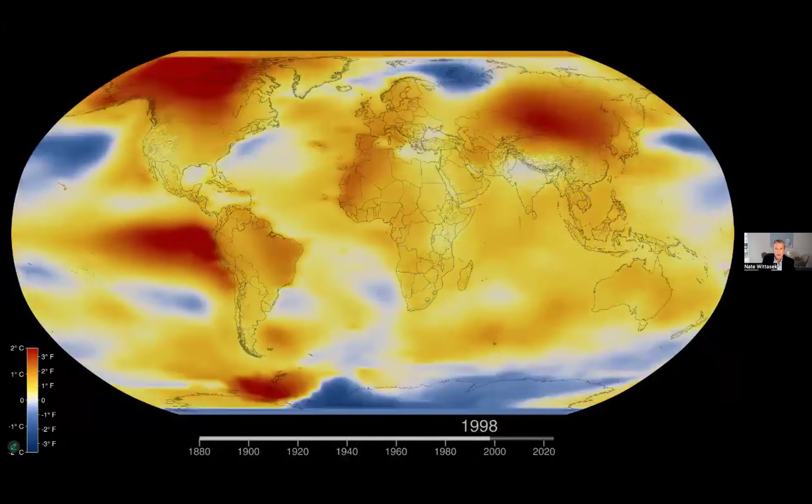So what I want to show you today is some background on what's happening. In this video, you see that in the early decades, we had mostly cooler than average temperatures. But as we fast forward, the temperatures steadily rise 2 and then 3 degrees above average. Warming is visible nearly everywhere on the planet, with particularly strong increases in the Arctic, the continental interiors, and the ocean regions, which are affected by shifting currents.

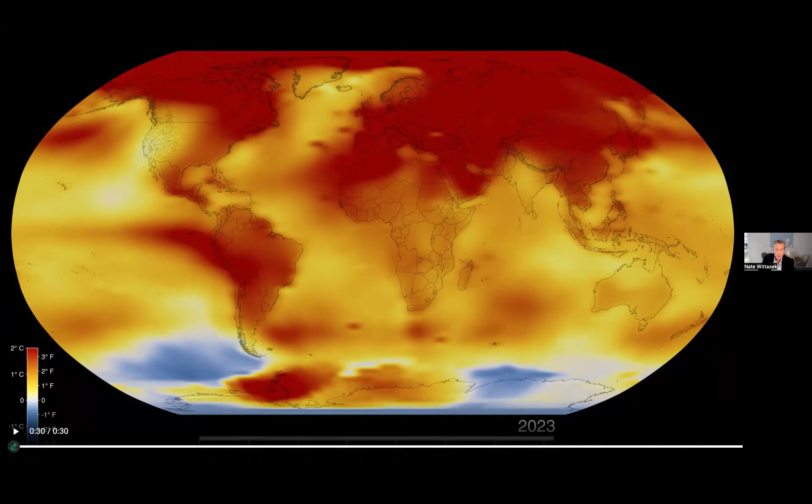The long and the short of it is that the baseline has shifted. Over the last 140 years, we have moved to record-breaking heat virtually everywhere on the entire planet, and this effectively represents a new climate baseline. It's not a temporary anomaly.

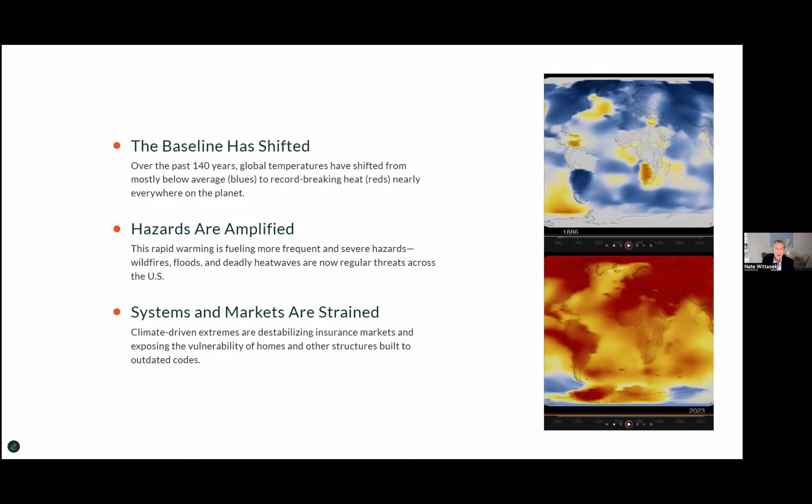What this means is that the hazards are amplified. The warming is intensifying wildfires, floods, heat waves that are now regular threats, and the long and short of it is that these events are more frequent, more severe, and more costly. This means insurance markets are destabilized by these escalating losses, and home and infrastructure built under outdated codes are increasingly vulnerable.

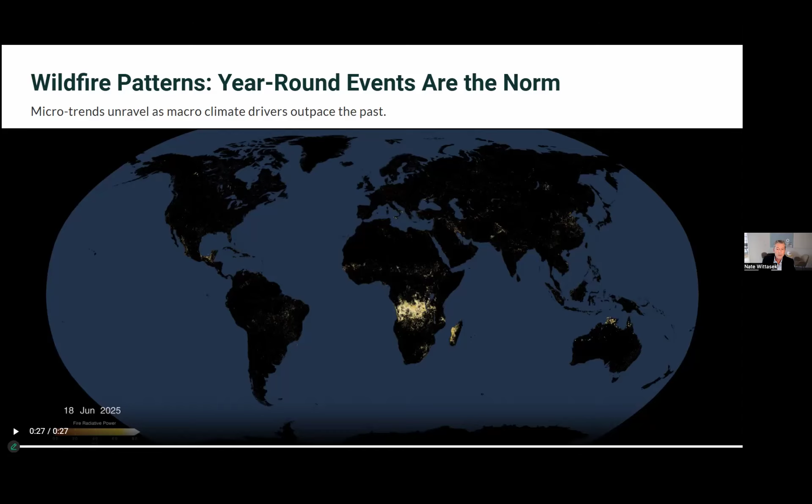In this video, you can see an annualized look at wildfire occurrences taken from a satellite, pulled together from the NASA Visualization Center. You can see in the course of a year what the planet looks like with respect to large wildfires. It's global, not local, and macro climate forces such as warming, drought cycles, and shifting precipitation now overwhelm historic seasonal patterns, creating unpredictability. So wildfire is no longer a seasonal hazard—it's a global, continuous threat driven by climate extremes.

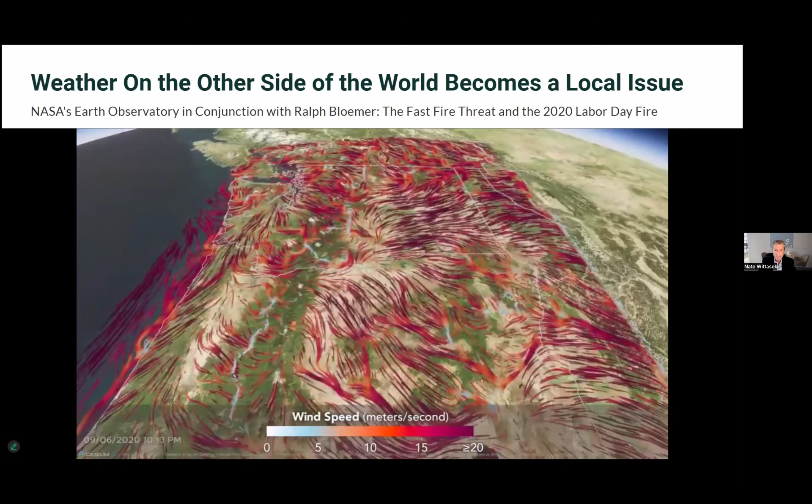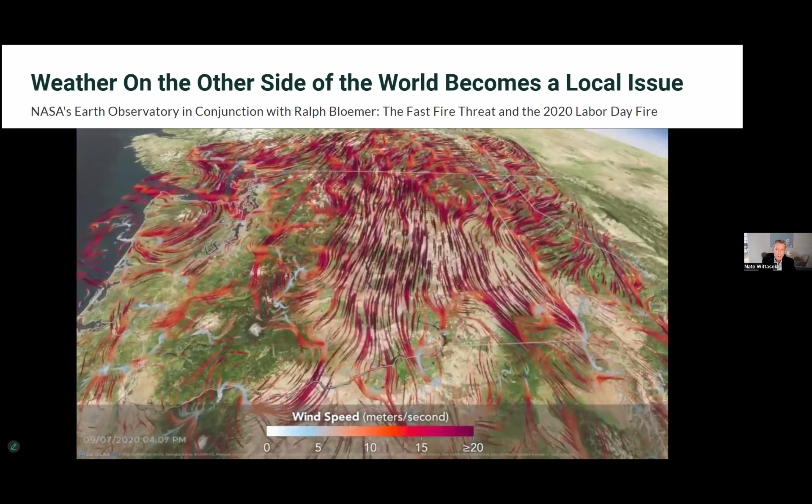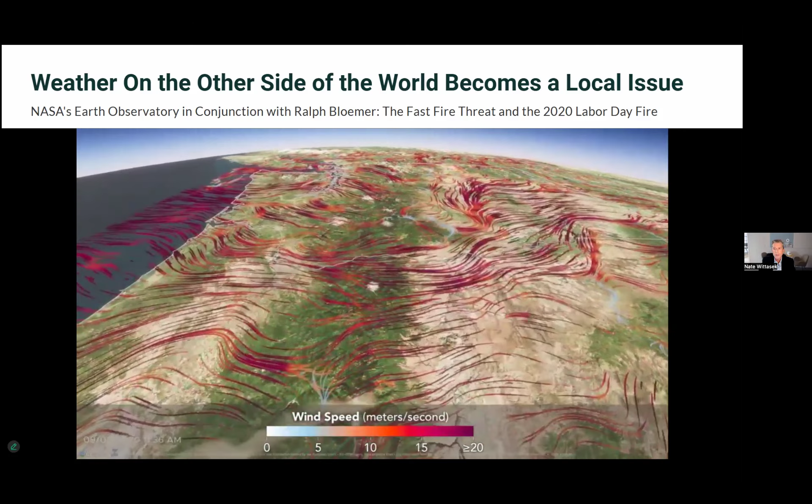In your home state, you have recently, in the last few years, been subject to some of the most incredible examples of this climate. In the 2020 Labor Day fires in Washington and Oregon, these were what we call fast fires. In 2 weeks, as much land burned west of the Cascades as during the past 50 years, according to the U.S. Forest Service. One of the Labor Day fires, the Cold Springs Fire, was the 3rd fastest ever recorded in the database. And what's really interesting...

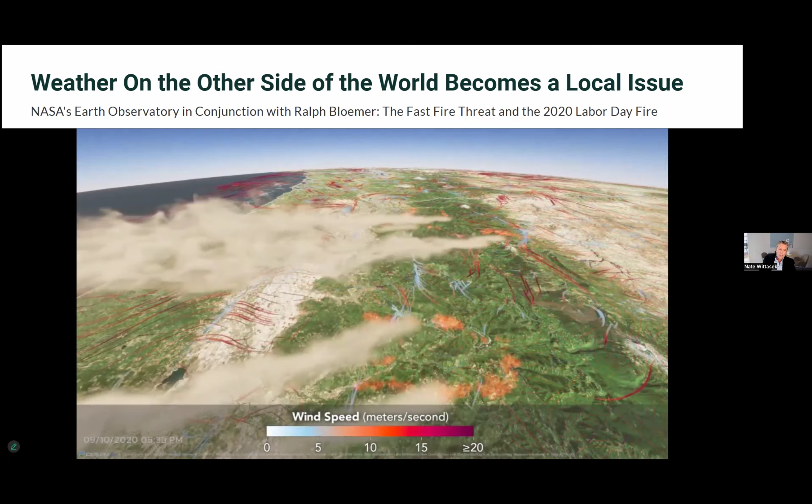This setup that you're watching on the screen began thousands of miles away with 3 powerful typhoons that struck the Korean Peninsula in quick succession. And this is an animation that was constructed to understand what was happening and relate the wind to the fire directions.

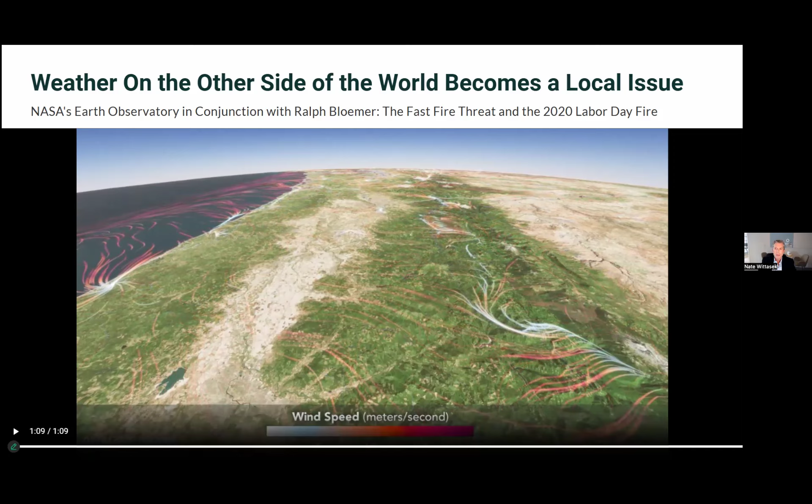So despite decades of investment in firefighting, policy, and mitigation, the long-term trend is pretty obvious when you look at this: U.S. wildfire acreage is rising, not falling. So what do we take away from this? One, the steep upward trend means that relying on past methods like basic fire suppression, basic hardening, or the way we historically have planned is no longer adequate. The driver behind this chart is a combination of climate change, including hotter, drier seasons, longer fire weather windows, growing fuel loads, and the expansion of the wildland-urban interface.

To be resilient, we're going to have to address all of these fronts, not just firefighting. Resilience means that we have to be using a proactive, multi-tiered strategy.

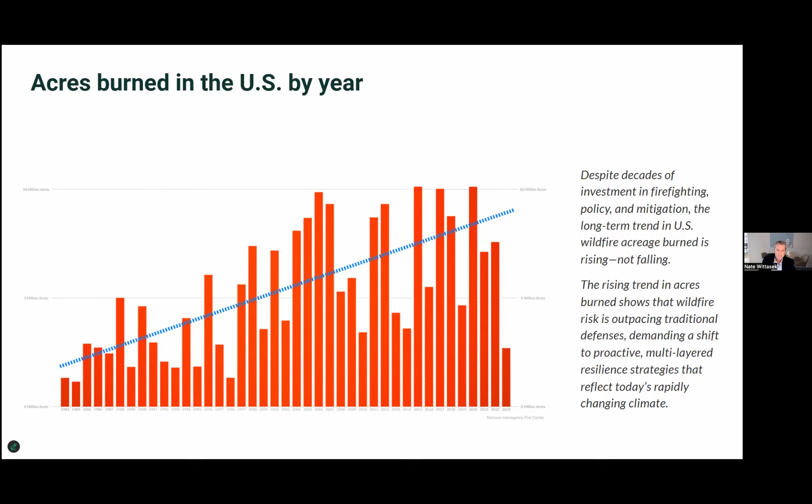When you think about the scale of risk as it pertains to financial losses, the first place we start is how many structures are at risk. We're approaching 90 million structures that are at risk across the US for different types of hazards, including wildfires, droughts,

severe storms, floods, freezes, winter storms, and tropical cyclones. And it's hard to say that one doesn't affect the other. As I mentioned at the beginning, the Labor Day fires in Oregon were really something that initiated from a cyclone across the world, which is something I think we don't always think about how that can happen, but that is exactly what is happening.

Disaster events have grown from a handful in the 1980s to about 20 to 28 per year in recent years. The economic impact has escalated dramatically as well. So whereas in the 1980s we were talking in the tens of billions, by the 2020s the costs regularly exceeded $100 to $500 billion annually. And if you look at this chart, it doesn't even show what happened in 2025 yet.

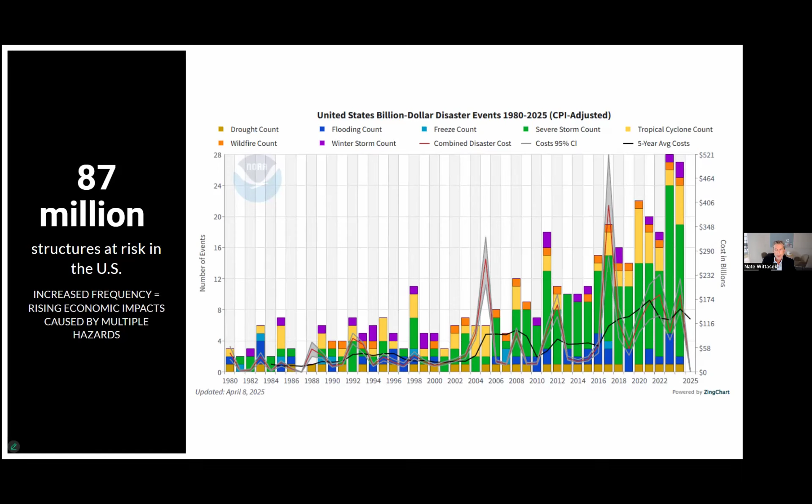When we think about risk relative to the population, the largest clusters are the West Coast, in California, Texas, Florida, and the Eastern Seaboard as well, where the density overlaps with the hazard exposure. Many counties with 200,000 plus units at risk are urban or suburban centers, not just rural wildfire or flood zones. This alignment basically means that the hazards are a mainstream market issue now. And people designing houses, people developing, people insuring are really looking at this closely. And there are systematic implications for affordability, insurance, and lending.

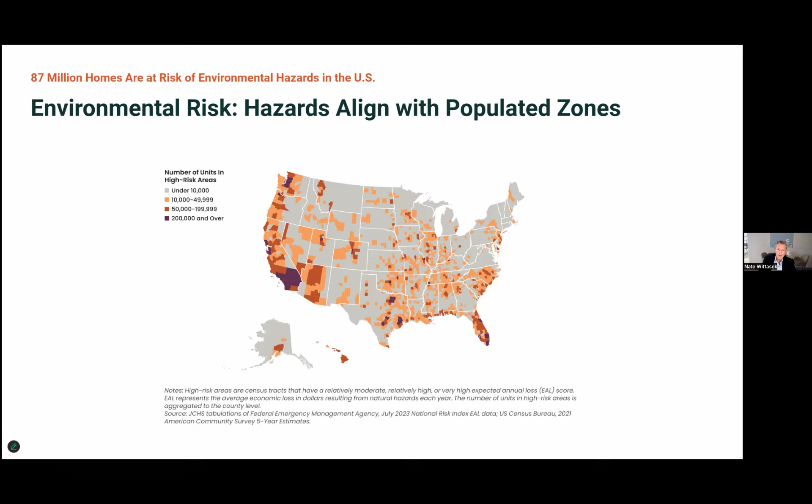So this risk that we're seeing, that you feel and that I feel where I live in California, Southern California, it's not isolated. It's actually embedded in the very places that we live, that other Americans live. And the housing stock that underpins this economy is impacted.

This is the Oregon risk map from the Oregon Explorer website. The designations were released after a comment period back in August of 2024. What you'll see on this map are different colors. It's a little confusing at first glance. You have over here sort of the loss, and down here the green colors are benefit. So what does that mean?

The loss is where wildfire is expected to have negative impacts, threats to homes, to infrastructure, or other valued resources. In contrast, the benefits indicate where wildfire would have a positive ecological outcome. This might be reducing future fuel loads, improving forest health, maybe supporting a fire-adapted ecosystem, or creating habitat diversity.

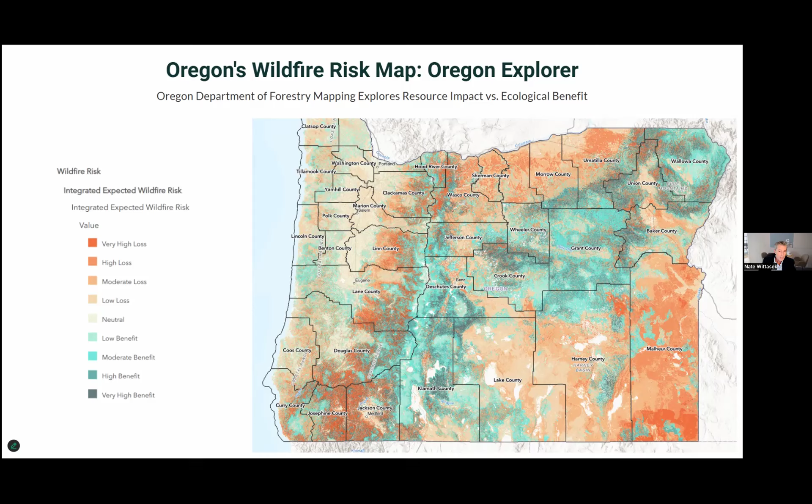Our favorite topic, codes. Code adoption is a patchwork across the United States. Only some states, shown in green, have widespread adoption, meaning more than 75% of jurisdictions have adopted hazard-resistant building codes. But most states are in fact lagging, meaning those states have little to no hazard-resistant code coverage. And this idea of moderate adopters is fairly rare. Very few states fall in the 25 to 74% range. So what this all means is that despite the known risks, most of the US remains vulnerable because the building codes designed for hazard resistance aren't broadly adopted.

On the right side, we see the policy activity. It's more active, but definitely uneven, and there's not a clear correlation with code adoption. So what I can say when it comes to what are we doing is that we have an inconsistent national strategy. We definitely have philosophical differences across the political spectrum, but the vulnerability still persists. It doesn't matter what the politics are. We know that homes are burning and other structures and communities are being affected. So again, effective risk reduction requires both stronger code adoption and supportive policies, not one without the other.

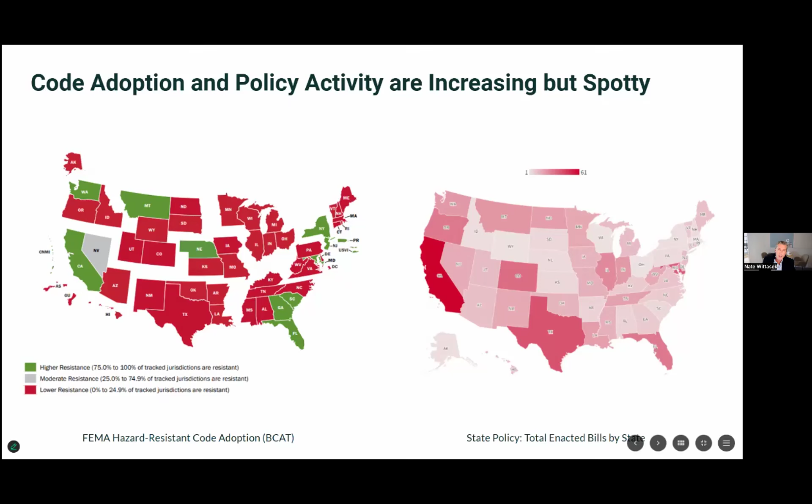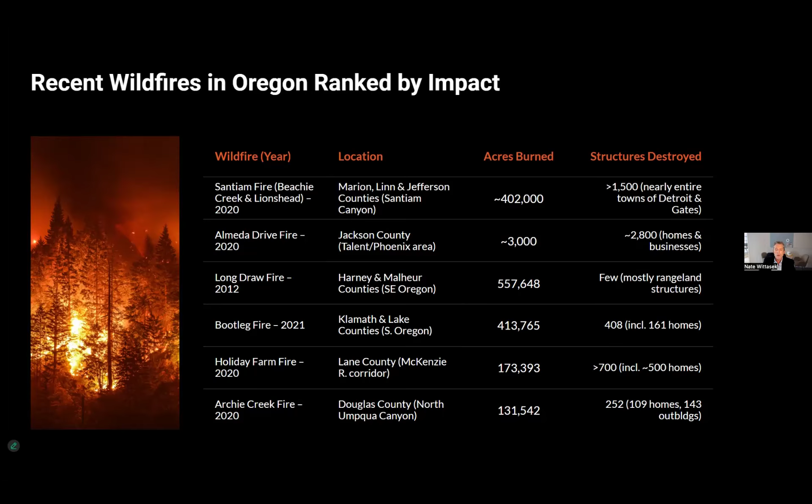Some of the largest fires burned by acreage here in Oregon had actually destroyed relatively few structures. Meanwhile, smaller fires near population centers like Almeda Drive or Holiday Farm caused catastrophic structure loss. And 2020, which most of these are from, was in fact a tipping point. Multiple devastating fires occurred in a single year, making 2020 one of Oregon's worst wildfire years on record in terms of structure losses, even if acreage is maybe perhaps a little bit worse now, this year. So in Oregon, it's not just how big the fire is, like everywhere, it's where it burns. Fires near people and infrastructure drive the greatest losses, even when the footprint is relatively small.

Being a fire engineer means that I actually love fire in a way. I started out as someone who just loved fire when I was younger, and I was a firefighter for many years. I was quote unquote an engineer before I was an engineer—I was driving trucks. Eventually I went through school and figured I wanted to learn how everything worked. In the case of wildfire, it's really spread by three main pathways: embers, which are wind-driven burning material; radiant heat, which is energy waves; and direct flames or impingement.

And still, this wildfire activity relies on these basic principles. So when someone says to me we can't stop it, I always say all you have to do is think about the fire triangle, which is fuel, oxygen, and heat. All you have to do is interrupt one of those and you break the chain reaction—you stop the chemical oxidation reaction. So how do we apply that to wildfire becomes the question.

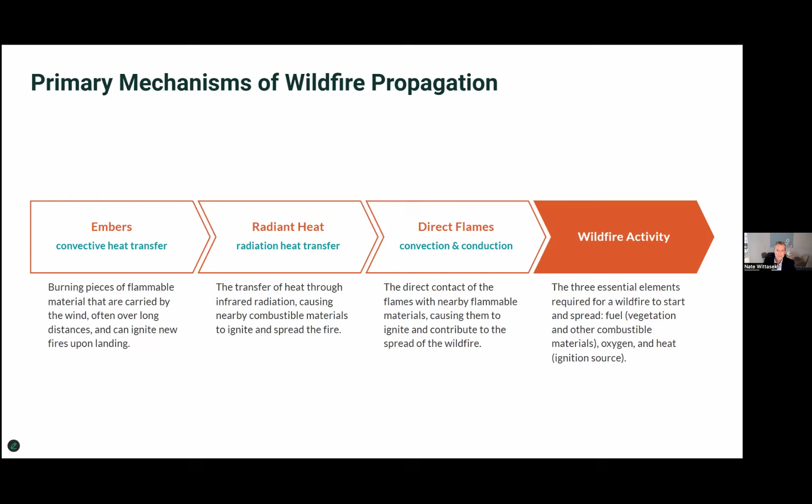The dominant driver is convection. Convective heat transfer powers early wildfire growth, carrying hot gases, flames, and burning embers far beyond the fire front. And this makes wildfires unpredictable, capable of effectively jumping highways or jumping long distances.

These embers and firebrands—a firebrand is just a slightly larger ember—can travel miles ahead of the main fire. In the Camp Fire here in California, spotting was documented almost 4 miles ahead of the fire front. This basically means that when you're starting fires 4 miles ahead of where the fire is actually burning, it becomes almost impossible to stop.

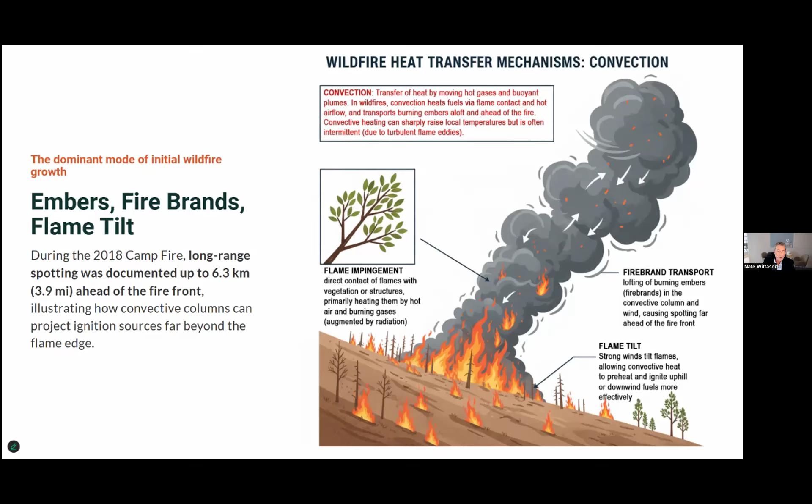As far as flame behavior, we think about flame impingement, which is direct ignition from contact with flames, and the tilt, which is affected by things like wind. So the punchline here is that wildfires grow explosively because convection carries heat and embers far ahead of the fire front, turning wind and terrain into multipliers of destruction.

It's a simple formula that drives this, and this is convection. The heat flux depends on the temperature difference between the flame and the surface and the convective coefficient. So with typical wildfire conditions, where you have a 1,000 Kelvin flame temperature and the surface temperature of something is 300 Kelvin, which is about 20 to 27 degrees, convective fluxes can reach 35 kilowatts per square meter. And when you combine that with radiation, you can get up to 90 kilowatts per square meter.

So what does that even mean? Well, this level is more than enough to ignite common building materials from great distances quickly, highlighting why both flame contact and radiant energy matter so much in wildfire exposure.

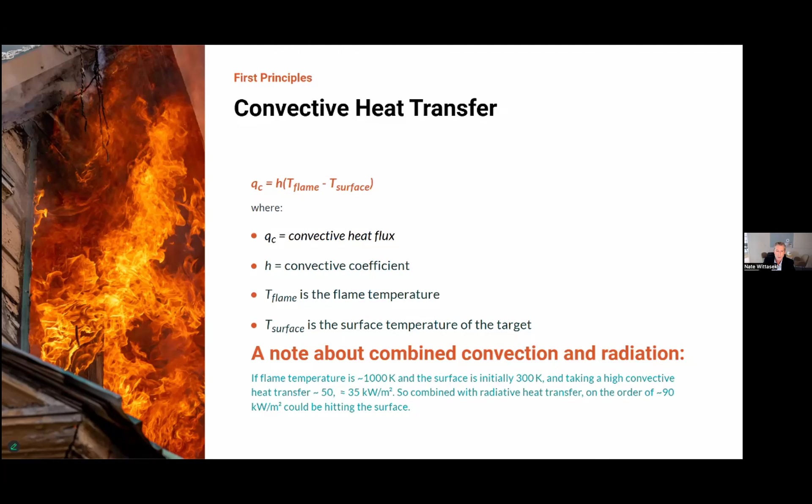We've all heard that embers drive most of the home loss. Certainly two-thirds of the homes destroyed in wildfires ignite from embers, or the ignition is attributable to embers. And this makes embers the primary hidden threat to communities.

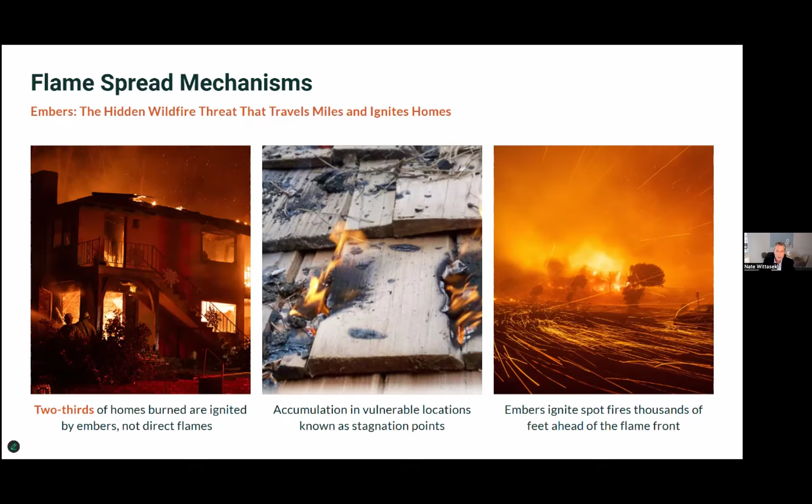Embers collect at stagnation points. These are points where, when the ember is blowing and it hits the building or the roof, ultimately they have to go somewhere—it might be the base of the building, it might be the valley of a roof. And these will sit there and transfer heat through those roofs into the structure. So the real wildfire danger here isn't always a flame wall. It's the ember storm that travels and bypasses defenses and ignites homes from within.

Roofs are a top ember target. We barely see any wood shake roofs, but certainly there are still many of those. Even if the roof is rated, it will collect embers in gutters, valleys, and gaps. So we have to design our structures to account for this.

But it's not just the roofs. Decks and porches become ember traps. They'll go anywhere they can. And the problem with these spaces is they're outside the home. So even if you sprinkler your home on the inside, there's just no way to extinguish the outside like this.

Windows, of course, and vents become a primary entry point where embers can enter your structure, go into an attic or a crawl space, or when a window is broken out, the smoke and the embers come in. And none of this is even really referencing the fact that smoke does incredible amounts of damage.

Wood is a high vulnerability as well. It ignites around 300 degrees Celsius—you've heard 451 Fahrenheit—and sustains around 600 degrees Celsius, and can burn within a minute under direct flame contact.

Now, brick and concrete don't ignite, but exposure can cause surface spalling. So non-combustible claddings come in different forms. You may have fiber cement or stucco, and they resist or block flame spread, but stucco can crack. Metals won't burn, but they do conduct heat. So they resist, but they are thermally thin. It's the old grab the frying pan off of your stove, and you'll know exactly what I'm talking about.

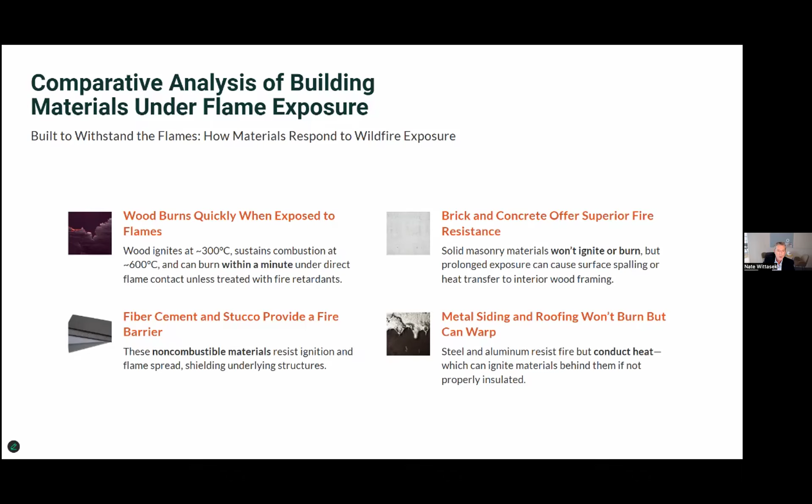Interestingly, we hear about the roofs a lot, but eaves are another top predictor of survival, according to different studies, like factors associated with structure loss in the 2013 through 2018 California wildfires. So this was a study of losses in 40,000 structures. What we learned is that eave condition actually mattered more than roofing material. Enclosed eaves reduced destruction risk by 21% and provided a 12% overall reduction.

They looked at fine mesh on vents, and 1/8 to 1/16 inch mesh vents improved survival 2 to 3 times. Screen vents in one particular portion of the study in the Bay Area showed that those homes were 24% less likely to burn. And this is low-hanging, cheap fixes that anyone can do. Open eaves were a much higher ignition risk. They had more than a 70% ignition rate relative to homes without that.

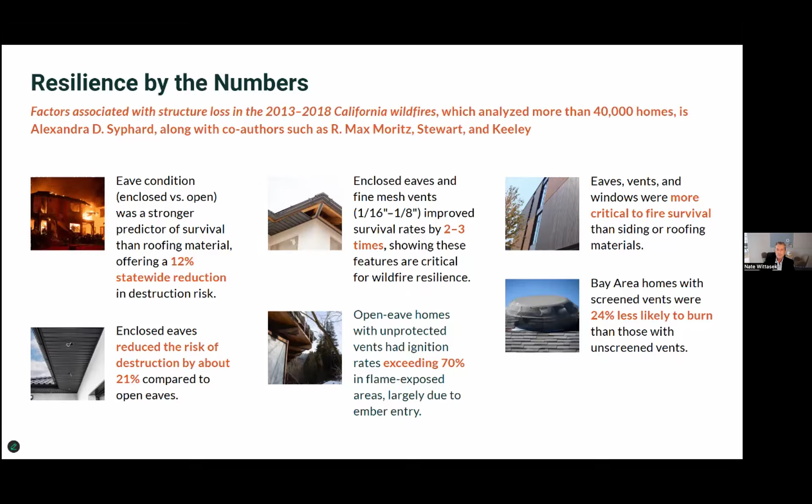Conduction is somewhat of a hidden threat. So unlike convection or radiation, conduction transfers heat through direct molecular contact. And it really governs how fuels dry out and ignite internally, not just on the surface. So in the forest, for example, heat will penetrate a log or duff, woody debris, and the way it does its damage is it drives out the moisture, and that allows any small bit of chemical oxidation to continue, the sustained pyrolysis.

In a peat or compact fuel, smoldering fire fronts can advance maybe 1 to 5 centimeters per hour, and they can actually continue burning even with a very high moisture rate exceeding 115%. When it comes up against a structure, the conductive heating of siding, decks, and other materials can lead to a delayed ignition. And this is why some homes may ignite hours later from heat-soaked wood and embers lodged in crevices. So this is the insidious slow burn that we see, which is quiet and exists when you think you're safe after the fire has passed.

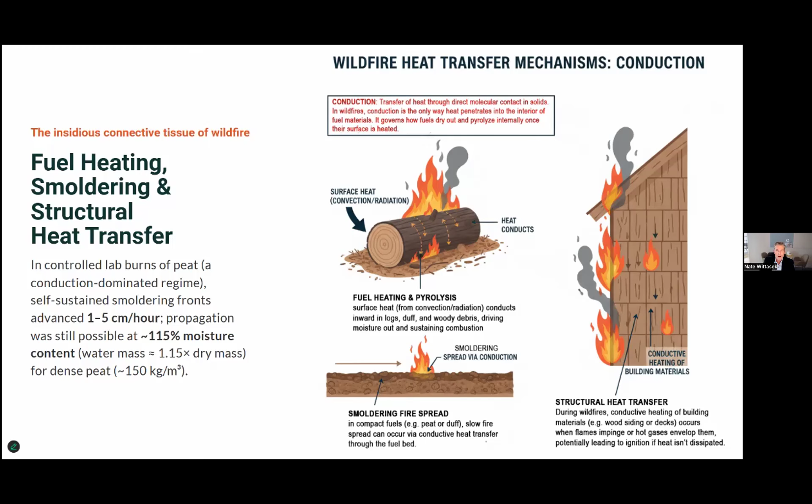One of the downsides of these very large fires that we've been experiencing is they will loft up large embers or firebrands. The size of those firebrands, sometimes like a tennis ball, they will literally hold heat for hours. And when it's already dry outside, you're already experiencing drought, that can set you up for a very dangerous circumstance.

So how does it happen? When structures or fuels are close together, flames from one ignite the other via direct contact or radiant heat transfer. The first structure or initial structures could also be ignited by an ember landing on the roof or next to the home. And again, we've said the vulnerabilities we know are open eaves, rafter tails, combustible siding, soffits, and decks. So really any envelope material that's combustible and not properly protected can be an issue.

When is having a combustible siding really a problem? It's when you're right next to a long-lived fuel source, and I'll show you this in a second. In terms of mitigation, one of the most important things we can do is maintain defensible space and break the flame pathways. So we want to use materials that resist flame spread.

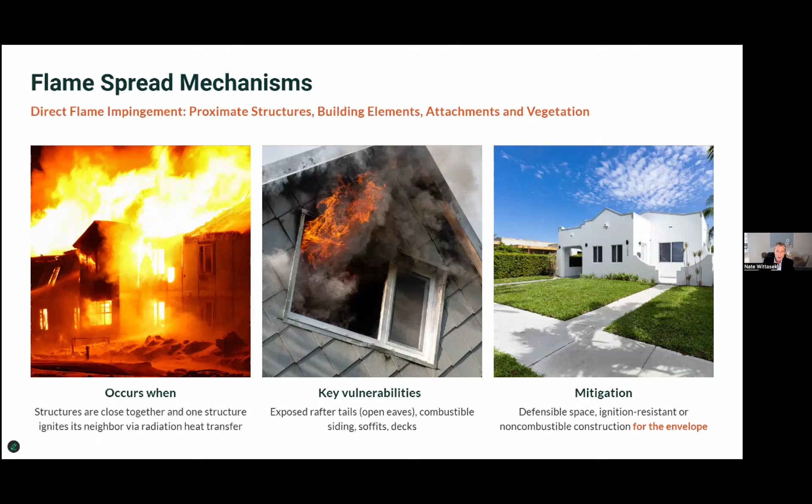So for example, in the Lahaina fire, it transitioned into a full-scale urban conflagration, which is what we just had here in the Palisades and in the Eaton fire. The fire initially spread through dry grasses, directly impinging on wooden homes before wind-driven flames leapt from structure to structure in this town.

The low separation distances between the homes, the wooden fences, and the parked vehicles created a continuous fuel path. And this led to what we know now was a terrible destruction of this entire community. And the rebuild is equally devastating when you look at the speed and the time in which these things happen. We're still barely recovering from Lahaina, from that fire, in terms of the number of those 2,200 structures that's been rebuilt.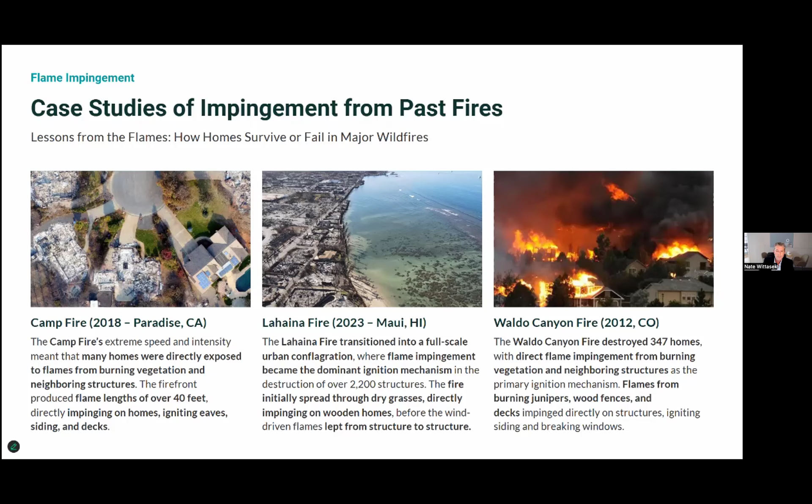Radiation is what I call the WUI structure loss driver. So radiant heat, which is energy waves, can ignite fuels at a distance without even having direct flame contact. Radiant energy dries and preheats vegetation and any other structure nearby, and that accelerates ignition once the flame or an ember arrives. It also is exacerbated with the failure of windows.

So for example, a double pane glass window might fail at a heat flux of 21 kilowatts per square meter, whereas tempered glazing will approach almost 30 kilowatts per square meter. Now that may not sound like a lot, but when you learn about how radiation works in terms of distance versus energy, you'll understand that it's actually significant. So in WUI, radiation turns one burning home into a neighborhood-wide ignition source. Window glazing and separation distance are part of the critical defense here.

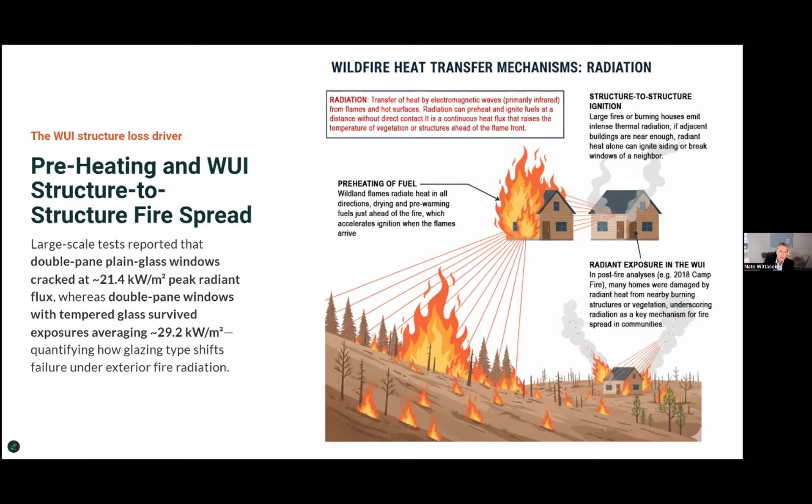Heat is transferred as electromagnetic waves, which is primarily in the infrared spectrum, and that raises the temperature of fuels and structures ahead of the fire. Whether or not something ignites depends on how much of that energy was received and what that material was that was receiving it. So denser and thicker materials will delay ignition, but again, will store more heat.

In FSRI experiments, they measured a median radiant flux of about 43 to 64 kilowatts per square meter at 3 meters spacing. That's enough to crack plain glass windows and ignite nearby combustibles. Even at a 4.3 meter separation, the flux remained about 27 to 32 kilowatts per square meter, again within the range of structural vulnerability. So radiation makes wildfire a neighborhood scale problem.

And the short distances in our urban areas, again, we're building our neighborhoods like wooden cities now. And we wonder why these fires are so devastating. And yet wood is a material that's abundant and it's something that's available and inexpensive, relatively speaking. But we can use it, we just have to think about how we protect it and where we use it.

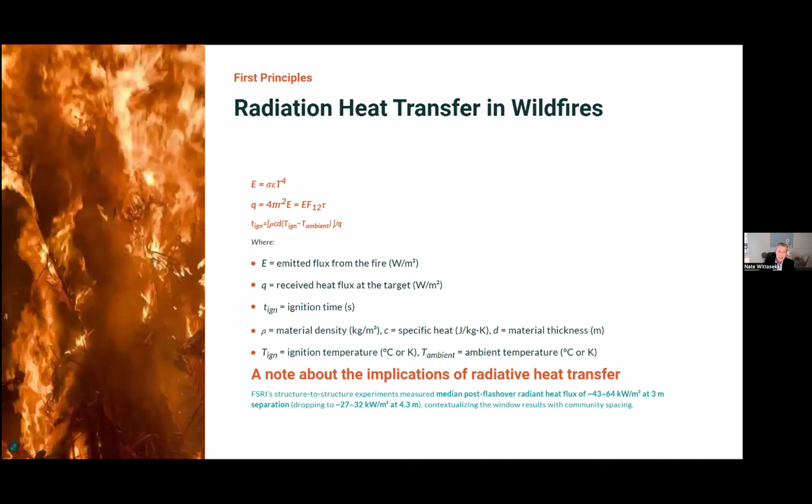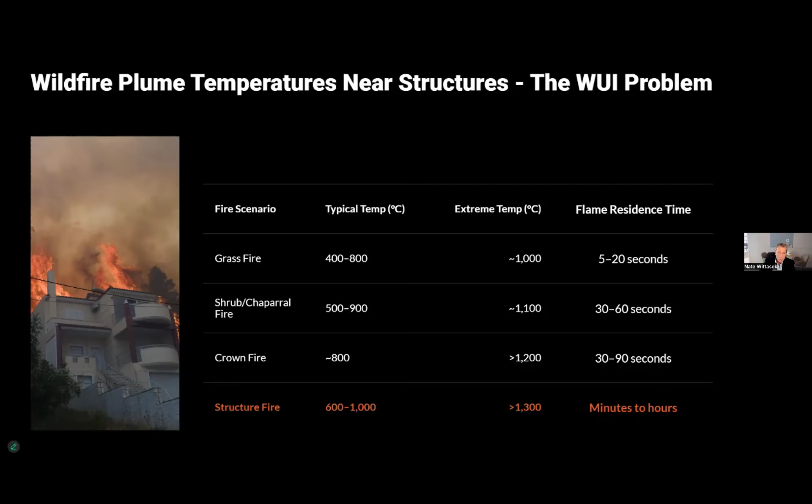Compare this with the structure fire that you see on the bottom. A structure could burn for hours, producing continuous radiation, embers, and ultimately flame impingement that would impact the structure next to it. And that's why it's so dangerous. So while wildfires pass quickly, once homes ignite, they burn hotter and longer, turning neighborhoods into true firestorms.

Wind makes it worse. We all know that. That was the subject of the first animation that I showed you in your home state. Wind-tilted flames were what caused our January disaster here. This allows for the ignition of multiple homes ahead of the fire line. And again, in urban centers, it creates a chain reaction. Once a few homes ignite, structure-to-structure spread drives massive conflagration. This was the case in the Tubbs Fire, the 2021 Marshall Fire, where neighborhood density really affected the outcomes negatively.

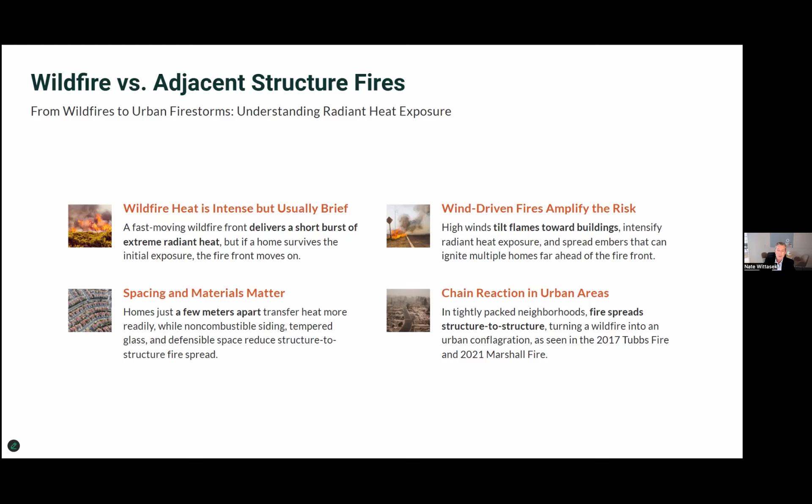The inverse square law is something I want to point to. Radiant heat intensity decreases with the square of distance. So when you double the distance, you only get a quarter of the radiant heat flux. And this is why, when you can, I know there are huge pressures to max out your property, but be cognizant of the structures next to you. Be cognizant of what the materials are when you're facing another structure.

Where you don't have distance, use non-combustible or ignition-resistant siding. Apply fire-rated construction so that you can deal with those long exposure duration burns. And again, the best thing you can possibly do is maintain a separation when possible.

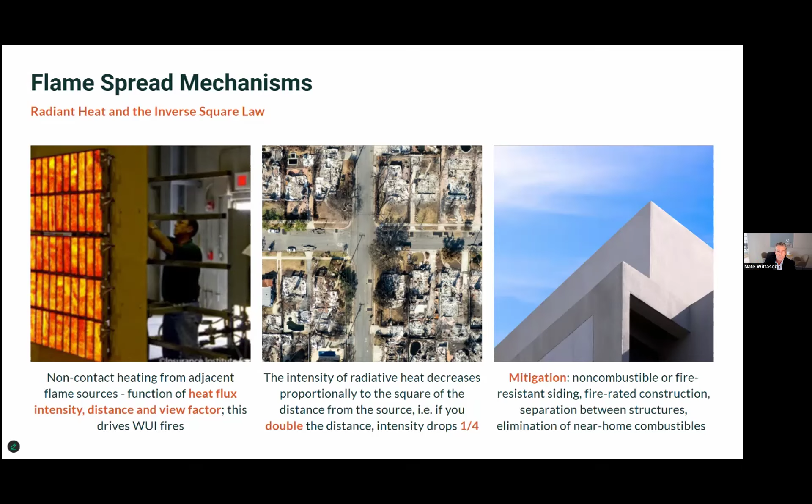Wood and vinyl siding ignite or melt under radiant heat, and that fuels the fire spread. Now, wood will tend to char at about 150 to 250 Celsius, and this delays ignition briefly, but sustained heat will still ignite it. And the windows become, again, as we know, the weak link. So my advice and what I do is, wherever possible, wherever you have an exposure, use multi-pane tempered glazing, which provides much better protection.

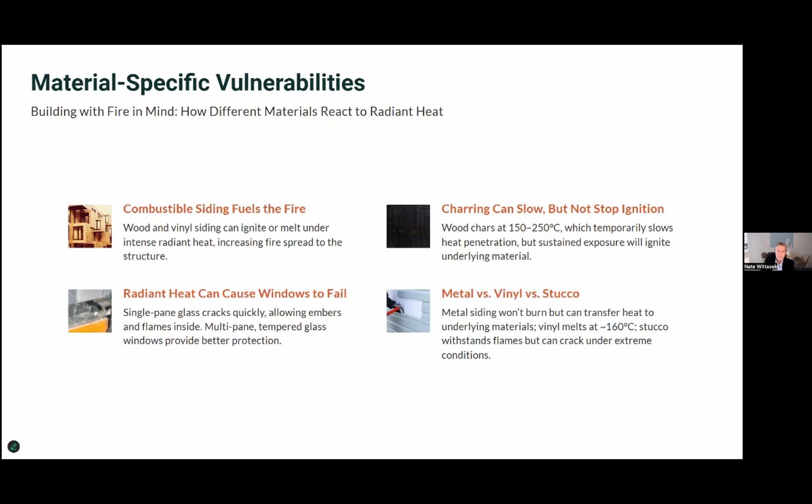Numerous examples where radiation heat transfer was something that was called out, including, for example, in the Eaton fire in Altadena, California, back in January. Yes, it was a wind-driven fire that spread into these closely spaced homes, but radiant heat was one of the main reasons after the embers came that the entire community was destroyed.

Each home became a continuous source of heat energy to the home next to it, even if it did not have to be downwind of it where the embers were spreading, because the radiation of one house burning was sufficient to ignite another house within 8 to 14 feet away.

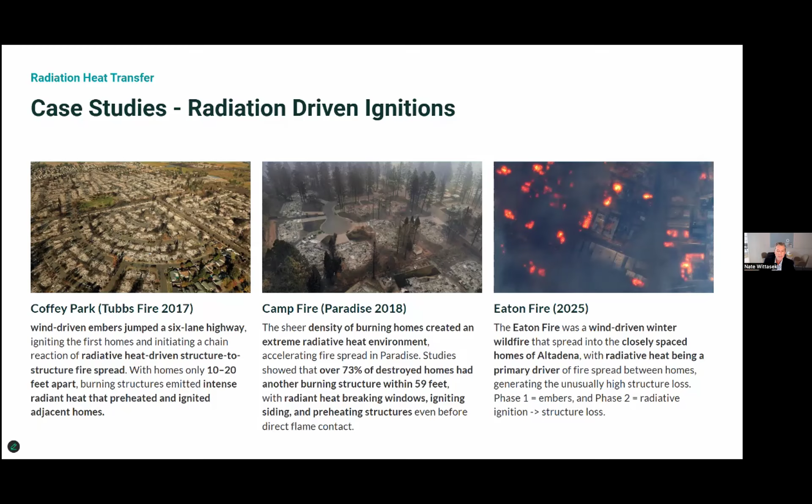This is where we start to talk about, well, what can we actually do then? What are the strategies for achieving resilience? And I like to start with passive fire protection. It's the most important part of the resilience tier. We think about environmental factors that accelerate fire spread. We look at prevailing winds, like Diablo winds, for example, that push flames and carry embers long distances.

We think about the slopes. Fires often race uphill because of preheating and convection. Sometimes that uphill race turns into a downhill run, as it did here in Los Angeles. In all the fires I can remember in Malibu, because of where our mountains are, the winds outpaced the ability of the fires to want to spread up the hill and actually push the fires down the hill.

Grass and debris can ignite quickly from embers or lightning, fueling fast-moving ground fires. And you have to think about things like dead tree stands, beetle-killed or drought-stressed trees, that add to fuel and act as firebrands effectively. Power lines in WUI proximity exacerbate the damages done once the fire starts. But in all cases, when you think of landscape, think about ladders. The more you have burning at once, the greater the heat release and the greater the thermal insult on the structure you're trying to protect.

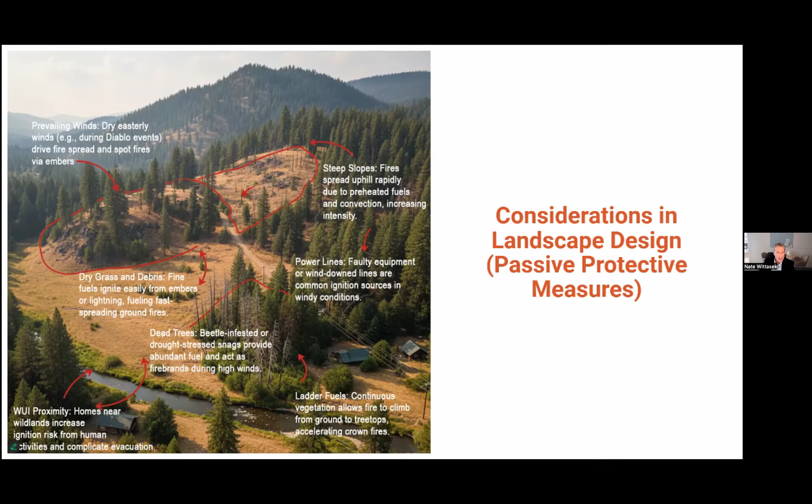So wildfire destruction isn't just a forest fire problem. It's a home ignition problem. This was a statement by Dr. Jack Cohen. It reframes the issue that the greatest leverage point for resilience is not only managing forests, but hardening the structures and the immediate surroundings. And that's something we can all contribute to. It's not rocket science, but it is something that we have to be detailed and diligent about.

Why does it matter? Forest management, thinning of fuels, prescribed burns, they can help, but they cannot eliminate ember storms. Home ignition resistance, which means roofs, vents, siding, defensible space, for example, 5 foot around the home, directly determines whether a structure is going to survive when it's exposed.

And once you adopt this view, the focus shifts from controlling the wildfire itself to reducing vulnerability at the structure. My belief is that the wildfire threat becomes manageable when communities recognize that their survival depends on homes being ignition resistant, not necessarily on just stopping the fire at the forest's edge.

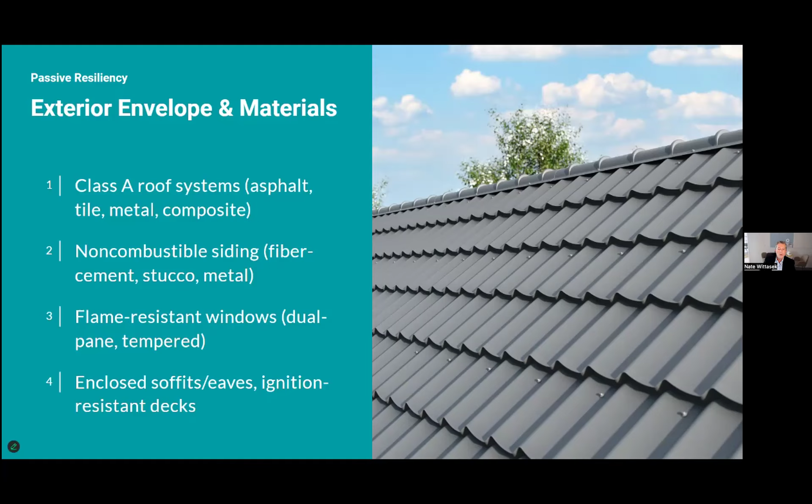The building envelope is your shield. So these hardened roofs, walls, windows, eaves, and decks together form the main passive defense. We think about common materials like asphalt composition, which often are Class A. They're vulnerable if damaged, however, and they lose their resistance when aged. And that aging can happen quicker than you think. It may only be several months to a couple of years.

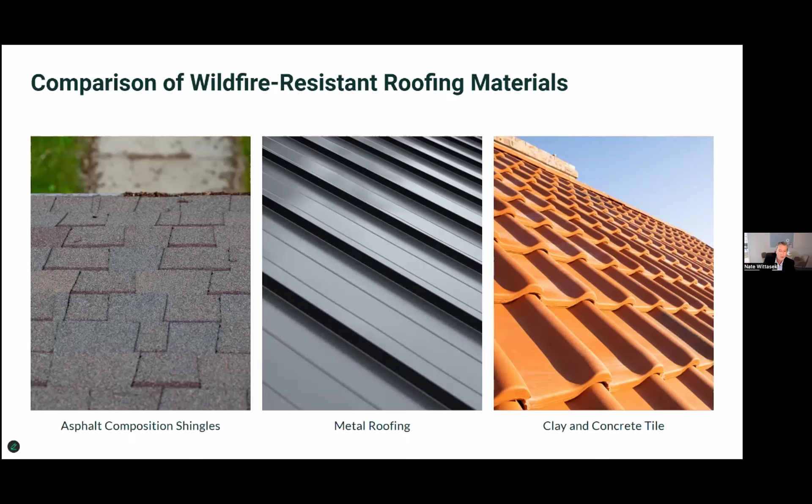Metal roofing is great, but it has no insulative value. And clay and concrete tiles are really robust, but they have gaps and cracks. And embers, if they find their way up and are able to reside up against the structure, you understand what can happen.

Synthetic roofing or composite roofing, like what you see on the left, can also achieve Class A ratings with proper underlayment. Cementitious products, which include fiber cement panels or other cement-based roofing, are heavier, but they require adequate structural support and may not be appropriate for many buildings. And stone-coated steel is something we're seeing, which is something that's very beautiful. It combines the ultimate fire resistance of a metal with the textured aesthetic stone coating, and it provides some insulation in the right contexts.

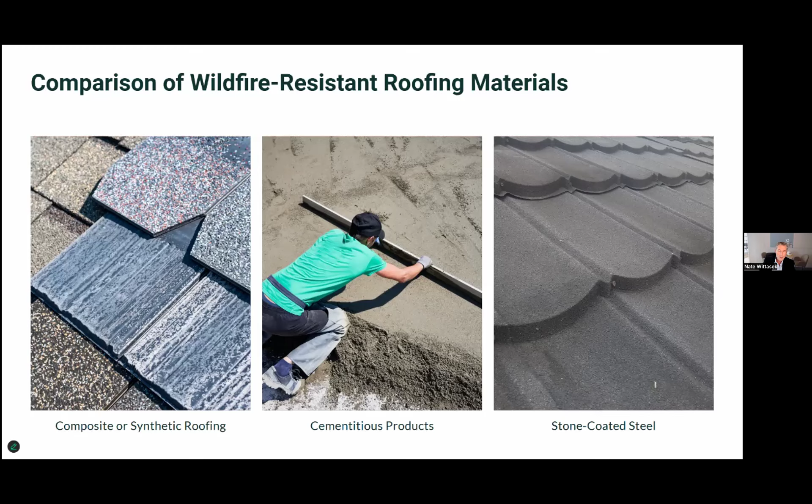We want to install roofing, and not just the roofing, but we have to think about what the pilot ignition sources are. Things like maintain clean gutters and use metal drip edges. Vents are the critical weak point. So always use minimum 1/8 or 1/16 inch vents or use a listed vent. And again, when you have walls and siding, it's the cracks, it's the gaps that embers lodge in that creates a problem. So the name of the game is to block ember entry.

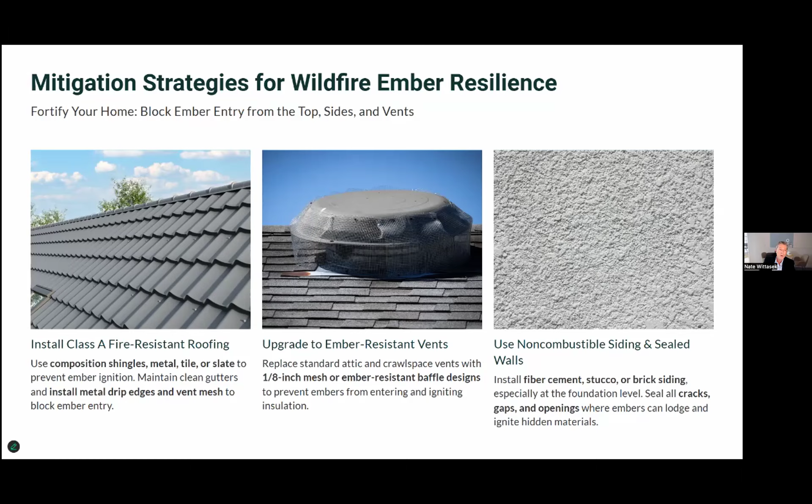Many of my friends whose houses burned down in January, and I think I'm up to about 15 whose houses burned down that I know well, they lost their houses because of attachments to the house or because of dense vegetation up against the house. Decking is one of those attachments. So if you're going to use decking, use fire rated, better yet, use non-combustible if you have it. Make sure you deal with the underside of the deck and really, really, really take that 5-foot non-combustible buffer zone seriously. Work on it with overhanging trees, and the name of the game is to reduce ember ignition sources close to the structure.

Standard vents are weak points. When you look at this table, you'll see ember entry rates are very high. They pass through a 1/4 inch. You start to get much better performance at 1/8 inch. And if you go too fine, you start to get issues with clogging up the very vent you're trying to have operate. Smaller mesh generally means a better defense, in other words.

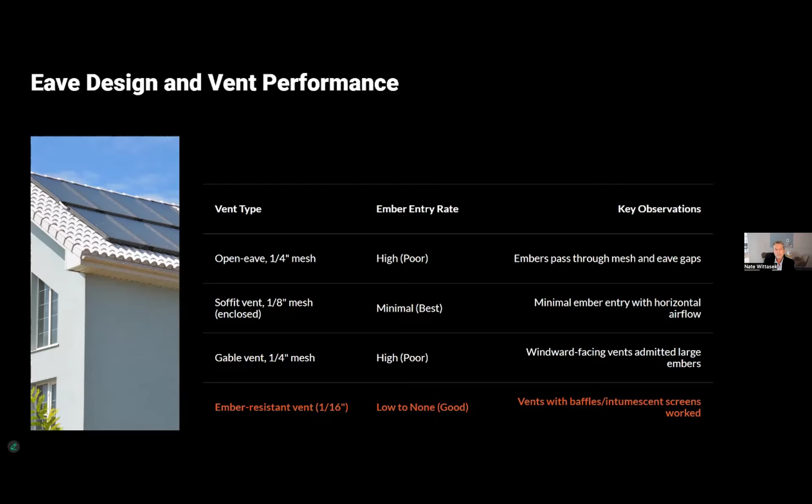Metal resists ignition better than vinyl. I would not put vinyl on your home if you were in a wildfire zone. Use vents that are compliant with ASTM E2886. These vents are designed to block embers from entering attics and crawl spaces. And also don't forget, it's not just about the vents, it's about your drip edge flashing. Install flashing at the eave to fascia joints to block entry into roof edges.

That's another common source. And fundamentally, think about a simplified roof geometry. In the very beginning, I talked about embers as being a function of stagnation points, which is where the embers collect. The more complexity in your roof, the greater the propensity for ember collection. That collection of embers sits and transfers heat through the roof and eventually could burn through or ignite something within the house.

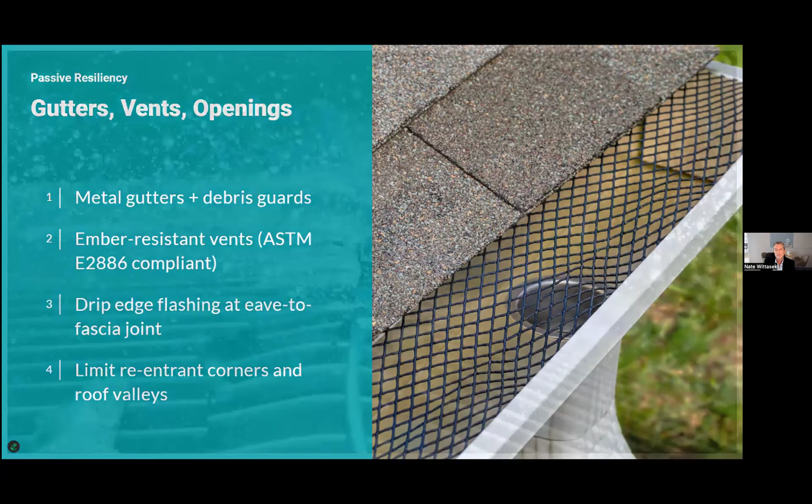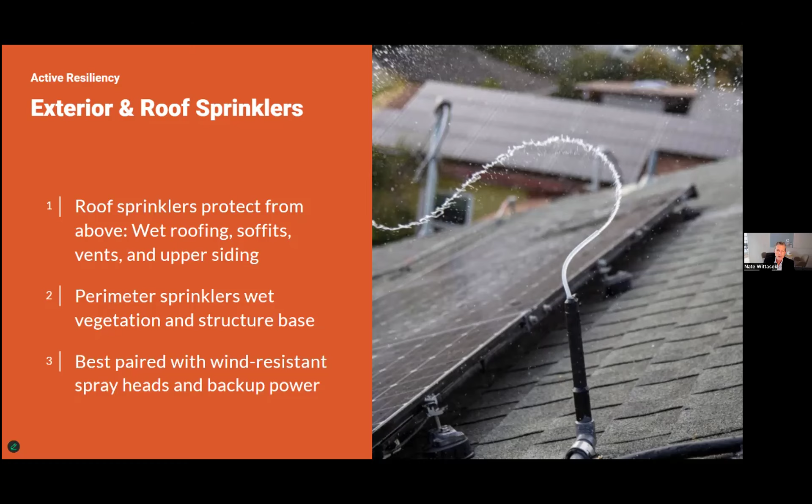Many of these systems, and there are many new entrants in the market, are integrated smart systems. Some of them use satellite data, some use sensors, but some of the best systems are solid state. The key is to have something that's been extensively tested. And the key is that active suppression can give you a distinct advantage.

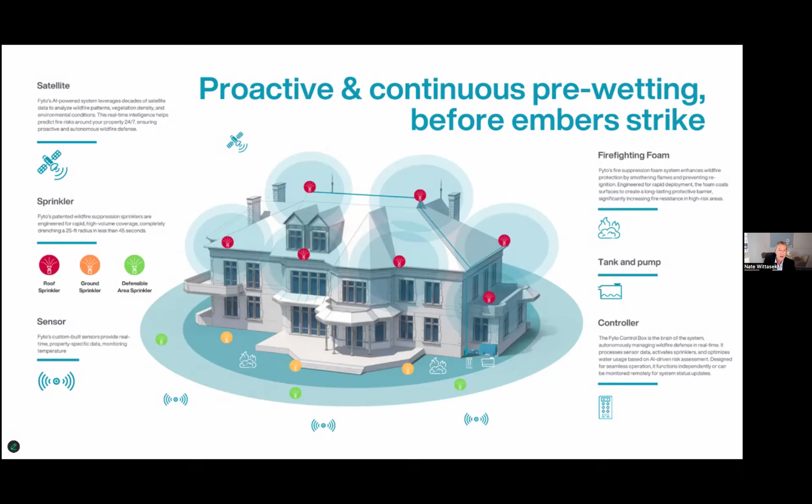The way I think of active suppression is it covers up for my sins with my passive fire protection. If I don't have everything lined up passively, the active suppression will do the trick. Remember, with active suppression, you need things like pumps very often. So these systems can be expensive and they may not be available to all of your clients.

So in the world of active protection, we just spoke about exterior sprinklers, which are designed to pre-wet, precondition, not just the home, but the area around the home. They can cool the soil, hydrate it, humidify it. They can actually be used to apply fire-resistant gels or other types of biodegradable materials to the structure. There's nothing bad about that from a fire standpoint.

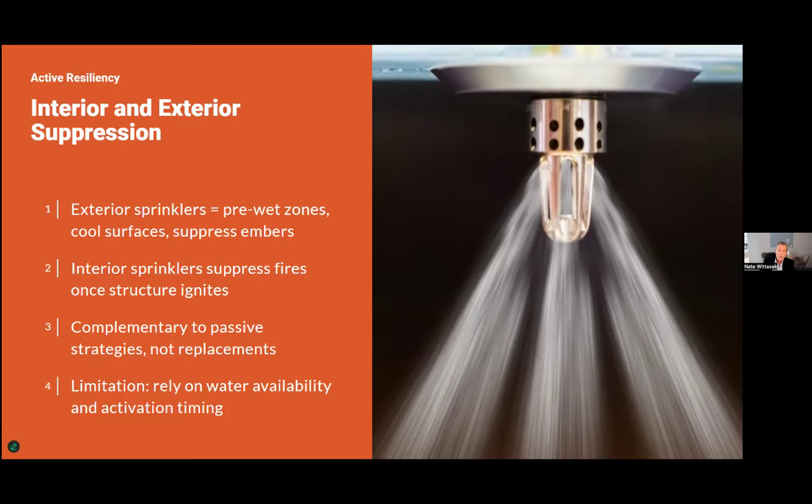Interior sprinklers are your last line of defense. They activate once the fire has gotten into your house and when you would expect significant smoke damage as well. They're complementary, these systems. They are not standalone solutions.

Some other deployable barriers and gel comments. I will say that fire gels can provide 24 to 48 hours of protection. Some other materials that are mixed with water can last for weeks. They're effective for windows, siding, and vulnerable exterior elements.

There's also things like roll-down doors, deployable shields effectively, fireproof blankets. Again, these can deploy at the moment of the event, and they can be used to seal off open areas, for example. They're most effective, these systems, when they're applied or deployed just before the wildfire arrives. So it is a short-term protective measure rather than a permanent defense. These deployable barriers and gels provide temporary but powerful last-minute defenses.

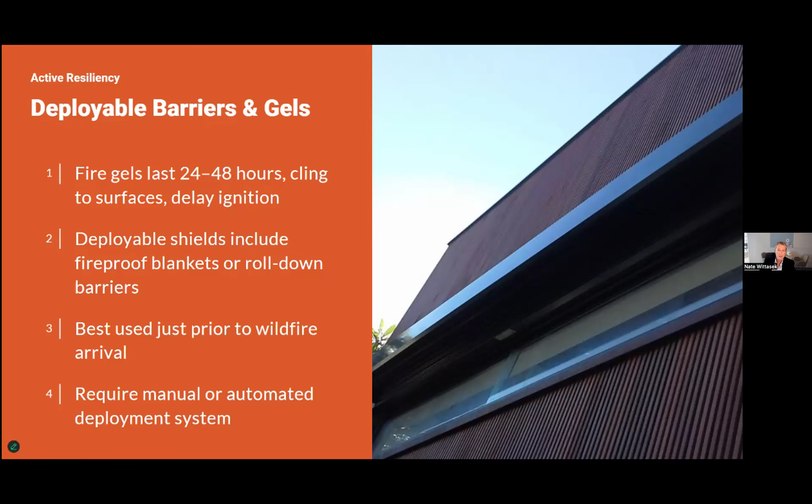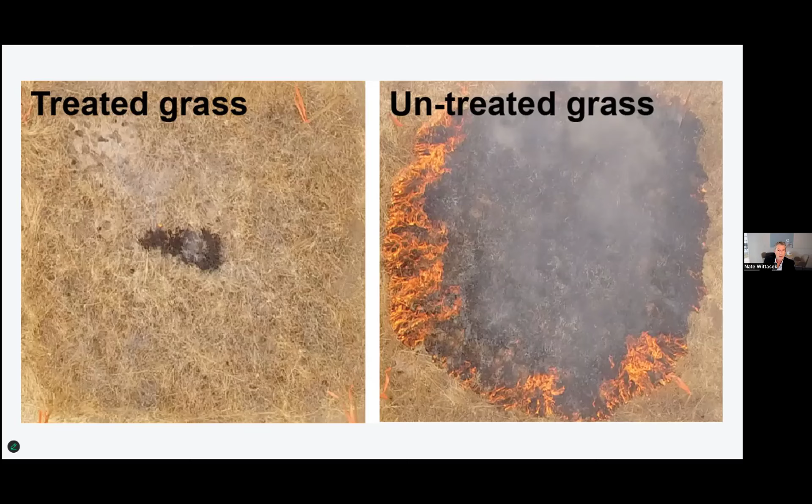Which brings us to the last tier, which is facilitated fire suppression. This is my way of saying, make it easy for the firefighters who are protecting your property to do so. They don't often have a lot of resources when they arrive on a site. So whatever you can provide can help.

This may include a pump and hose setup with 1.5 inch or greater hose stations. You want to be able to draft water from a pool, a cistern, a storage tank, anywhere you can, because water often goes. Many homes I know may have private pumps or wells, but in a municipal context, those extra water supplies make a huge difference.

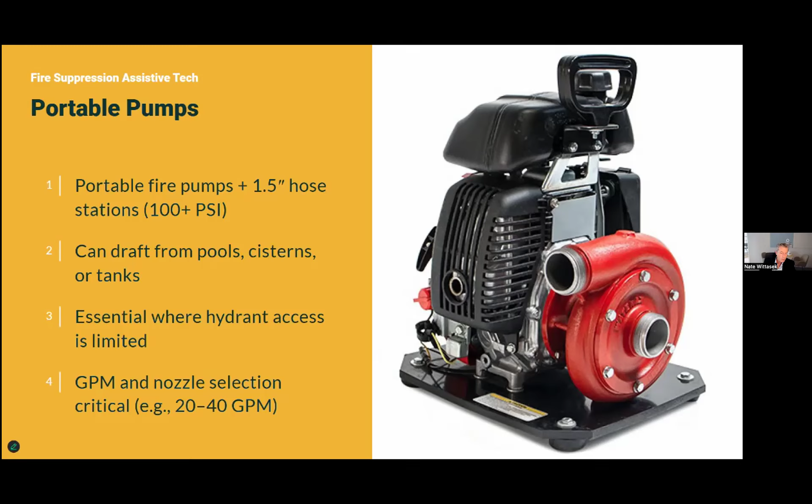These are essential in rural and WUI areas because they allow for fire defense where municipal systems don't extend. So proper 20 to 40 GPM nozzle selection is critical for effective suppression as well.

Monitor nozzles are a bit more exotic, a bit more big picture, but they can be remote controlled and they can deliver sustained water or foam flow to vulnerable areas. This is effective for creating a defensive wetting zone in front of a structure. And again, you can combine it with a foam or a gel to make it much more effective.

Water works as long as it's actually adhered to the surface it's protecting. What the foam or the gel does very often is decrease the surface tension of the water, which allows it to stick to a surface much longer before it evaporates.

Water in of itself, when it's heated, has a chemical bond that is effectively broken, which results in cooling, as does the transition of water from a liquid phase to a gas phase. So these are the benefits of water, and the foams and all the stuff we put in it is just meant to make water do its thing better. It's this beautiful dipolar tetrahedral covalently bonded structure that has this magical ability to interrupt heat in a fire.

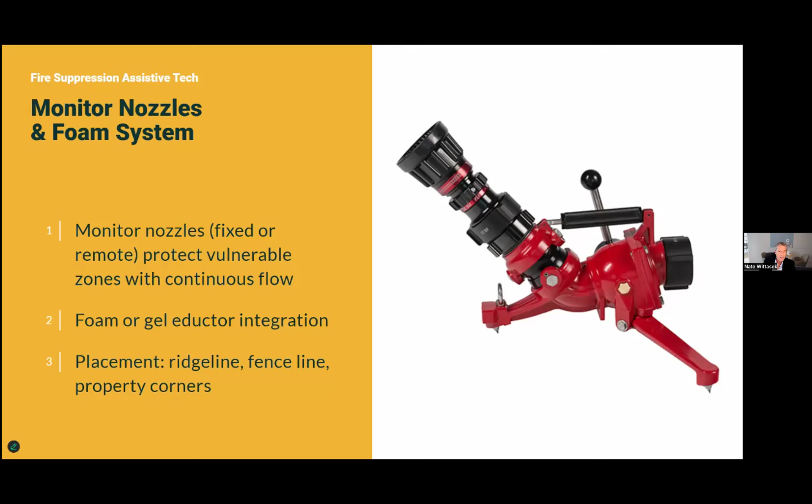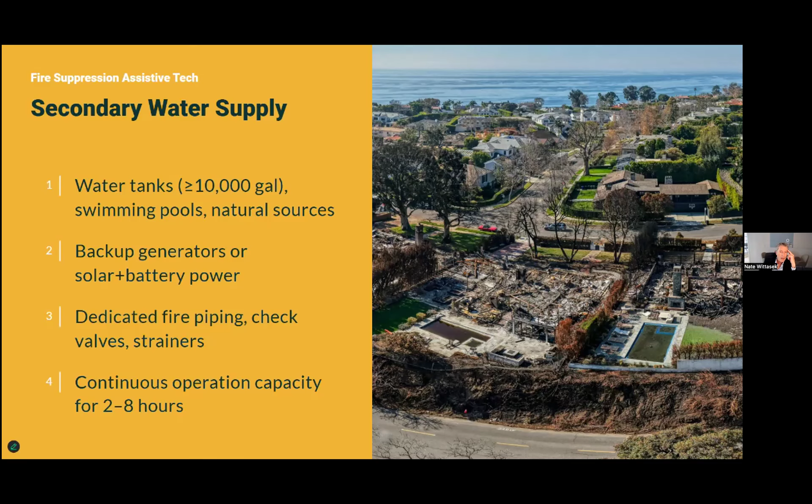So again, when you have an option, if you have such a thing, utilize it. A pond, anything that has water, but make sure you don't leave out the reliable power backup. And sometimes you may even have properties that warrant specific piping infrastructure on the property, so where hydrants run dry or power fails, these secondary water systems can provide a lifeline in keeping homes defensible during a fire.

Again, my theory, my working theory is we can protect our structures. I 100% believe it. I've been doing this for 30 years in our urban centers and in wildfire areas. Studies indicate that we can see 35 to 50%, up to 75% risk reduction by simple passive measures that we can institute on our structures. Some of these are cost neutral.

Using non-combustible roofing, siding, ember-resistant vents alone can cut our risk by 40%. And then when you add in defensible space, it makes all the difference. Can we get to 100%? I don't know, but you combine those measures, those passive measures with active measures, and you'll start to really tip the scale.

So we need to do this because oftentimes our neighbors don't do this. And while we need to rely on our neighbors, and we should moving forward, we can do parcel level protection. It's where we all have to start. And if your neighbor does it, it reduces the risk to your structure as well.

I wanted to note and go back to the one statistic or example I gave earlier of the Ham Lake fire, which was on the Gunflint Trail. No homes in that fire with a functioning exterior sprinkler system were lost. And in the same fire, all the structures that didn't have it were lost in that case. So they can make a huge difference.

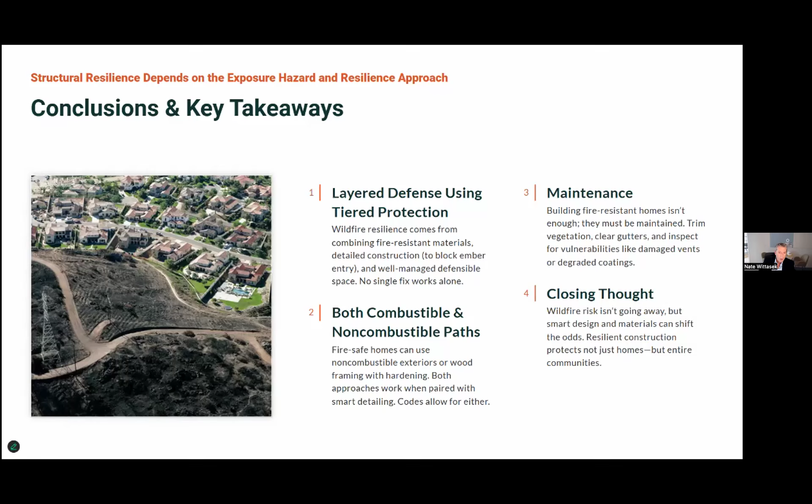I'll leave you with this. Wildfire resilience is about layered protection. No single solution gets you to where you need to be. Effective resilience requires resilient materials, tight construction, and well-managed defensible space. We can go with combustible and non-combustible pathways, and the maintenance is non-negotiable. So wildfire risk won't disappear, but resilient design and materials shifts the odds. And protecting our individual structures safeguards the entire community. Thank you.

Nate, that was really fantastic, and I'm overwhelmed with all the information, and it's just a depth of research and science behind a lot of the recommendations we see at a very cursory level. So I appreciate that. I've got a handful of questions myself, but before I do, I see a question from Mei Chang in the chat. The question is, how about solar panels on the roof or glass solar roof tiles? And I would encourage, if you do have a question, turn on your camera and raise your hand. That'd be great.

So solar panels can, and they can burn, but they also create places where debris can hide under. They create stagnation points. On the whole, I don't view solar panels in of themselves to be something we cannot design around, but again, this is where that maintenance talk becomes critical. As far as what they're constituted of, if it's plastic based, that's one thing, but a lot of solar panels are relatively innocuous, though the metal framing matters too. What I find on my own roof, and I have solar panels, I get all kinds of pine needles and things that collect, and it's hard to keep track of. So, all things being equal, it's a risk, but again, if you think about layered protection, it becomes much less of a risk.